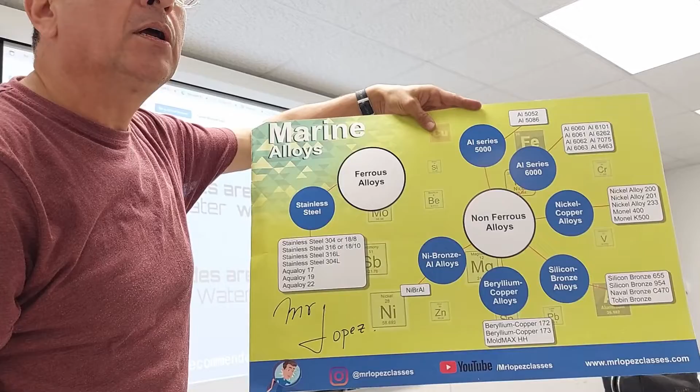I have ferrous alloys and non-ferrous alloys. You have ferrous alloys, those are the ferrous alloys allowed for marine environment. Non-ferrous alloys, all of those alloys are allowed: alloys based on aluminum, alloys based on nickel copper, alloys based on silicon bronze, alloys based on beryllium copper, or alloys based in copper, nickel and aluminum. Those alloys are allowed for marine environment, non-ferrous. You have that poster in your book. If you want this poster, you can buy this poster.

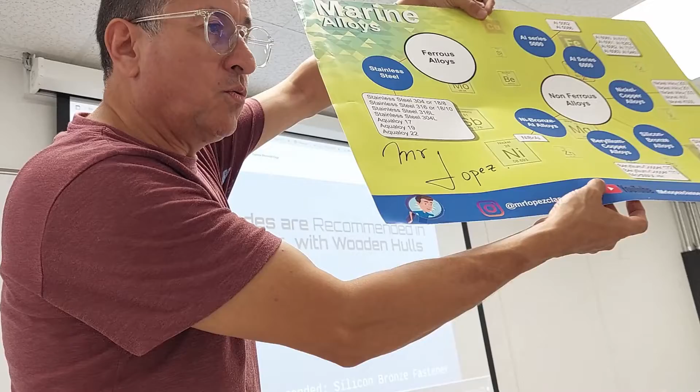Okay, this is for the alloys. This is the pedestal. And this is the boat. And this is the outlet of the boat where the shore power is connected.

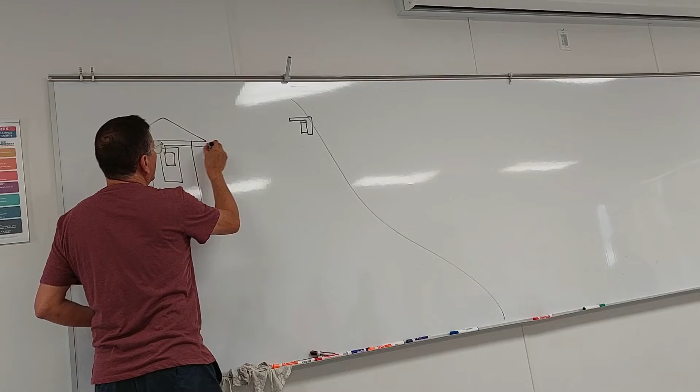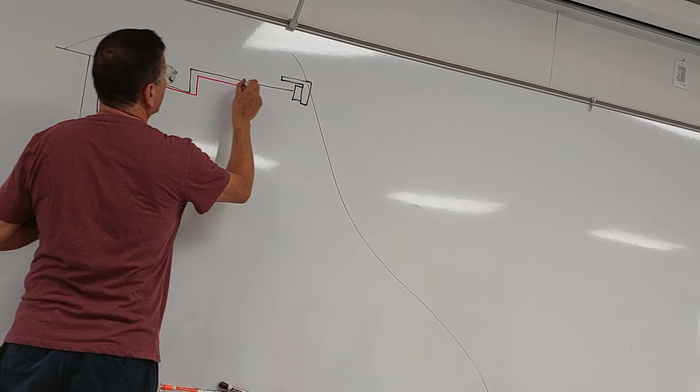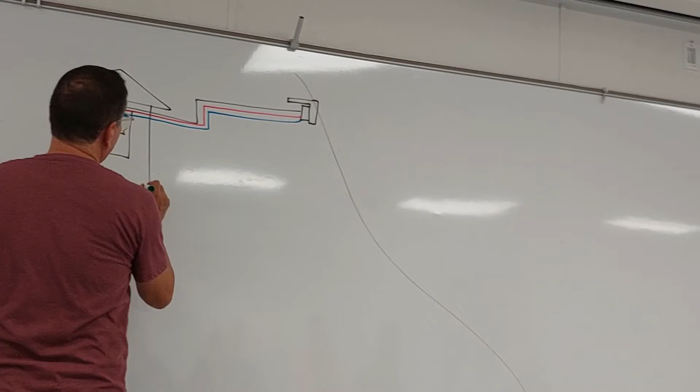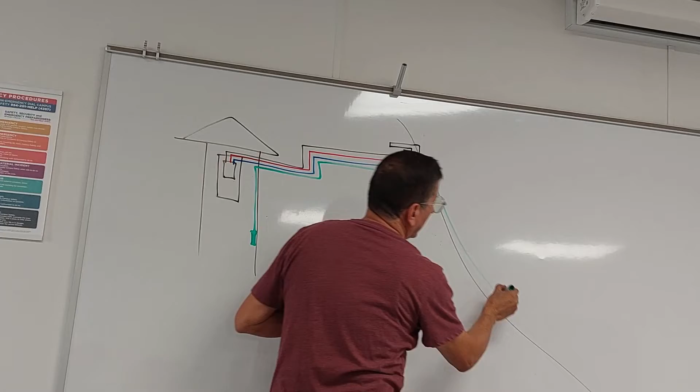Everybody follow me? And here from you have a hot, suppose that is double phase. You have other hot. You have the neutral. And also from here, from the side of the panel, you have the ground. And the ground enters here and goes directly into the ground bus bar of the AC panel, and after that into the...

What is this? Bonding. The bonding conductor. Where is it located normally? Middle of the boat? On the stringer. Oh, okay. And the bonding conductor is connected outside with the sacrificial anode. I put zinc, but could be other metal.

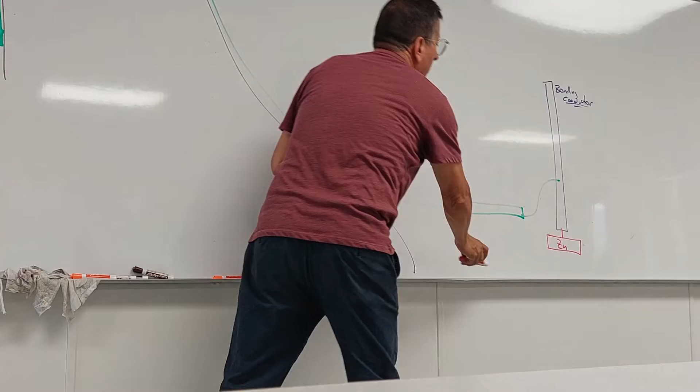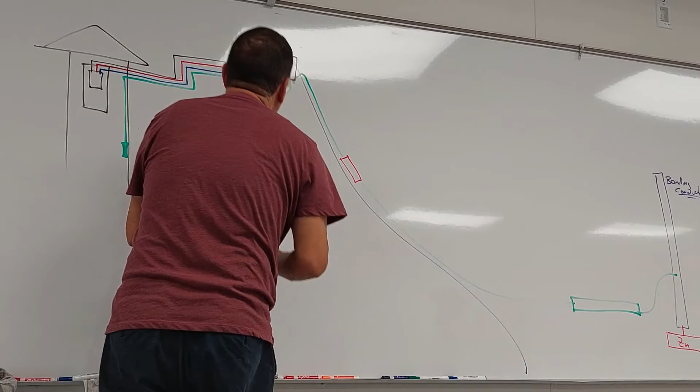That's the ground. And here I have located what? The galvanic isolator. Okay, this is the protection. Now here this is the AC, the main breaker, and those are the small breakers. This is the AC panel. Yeah? AC panel. And look at this.

This is the isolator transformer. Look at the function of the isolator transformer. I have hot, and after that continue the other phase, and this one in the middle is the neutral. Everybody follow me? Because neutral and ground are connected together with the frame, only at the source of the power. In the secondary, I have exactly the same situation.

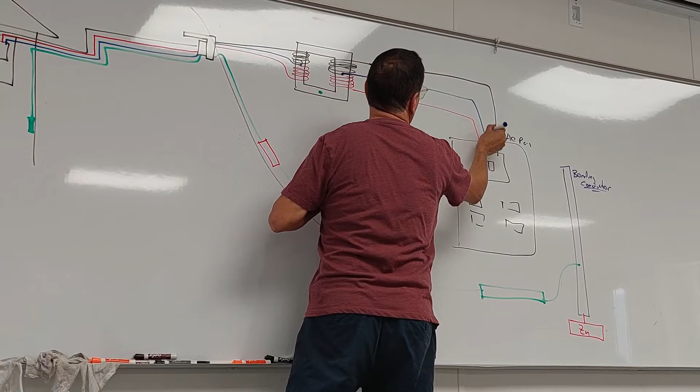This is neutral. This is phase 2, and this is phase 1. That's okay? This is the ground produced for the transformer, and that ground will be connected here.

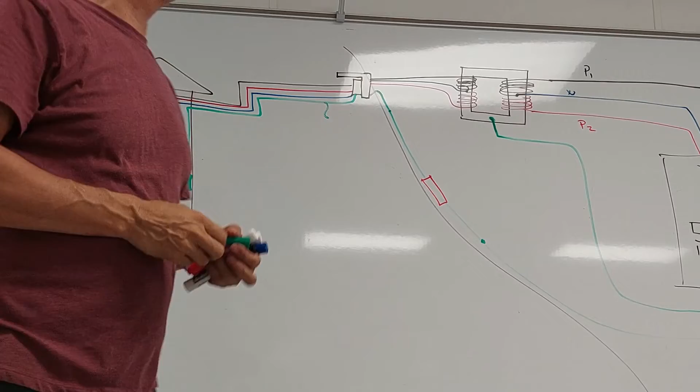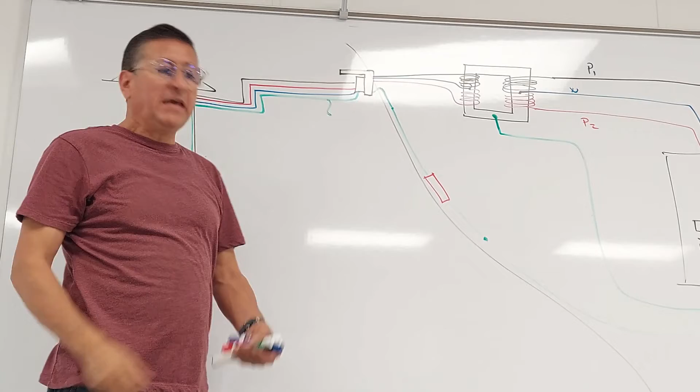Okay, suppose that I have this ground contaminated, like we explained before. We have current in that ground. Does this element protect the boat from a ground contaminated? No. No. Does this one protect the boat? Yes. Yes. Because this one internally has diodes, located in different positions, and capacitors, and blocks that current.

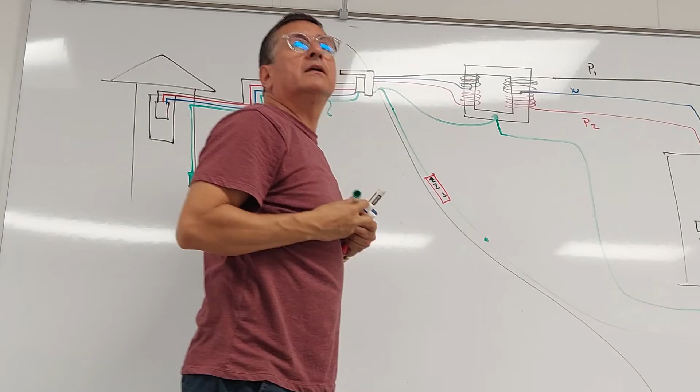Suppose that current enters contaminated here, and that current continues contaminated here. This is not a filter to clean ground. What is the function of this? Clean the sine wave. Clean.

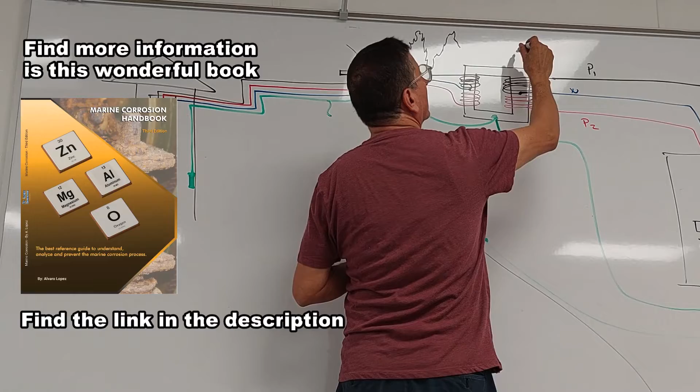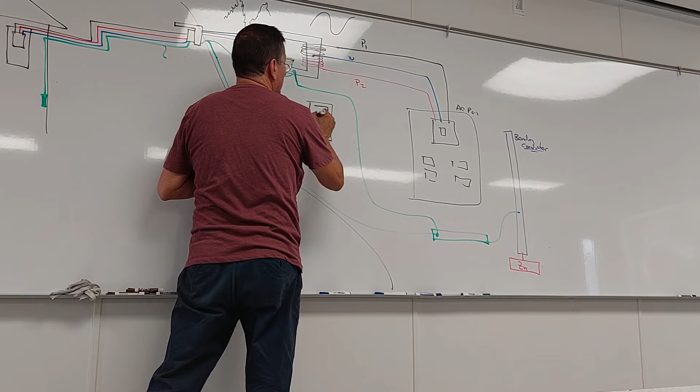I'm going to use the voltmeter here, and we are going to check volts DC. Volts DC. And we are going to connect here, suspended in the water, the silver chloride electrode. This is the water line. I connect to the negative of my voltmeter.

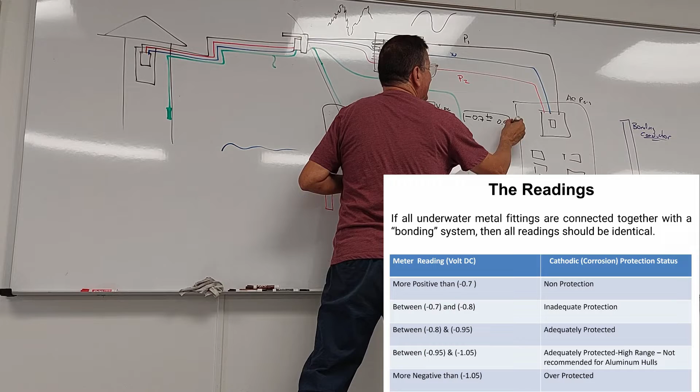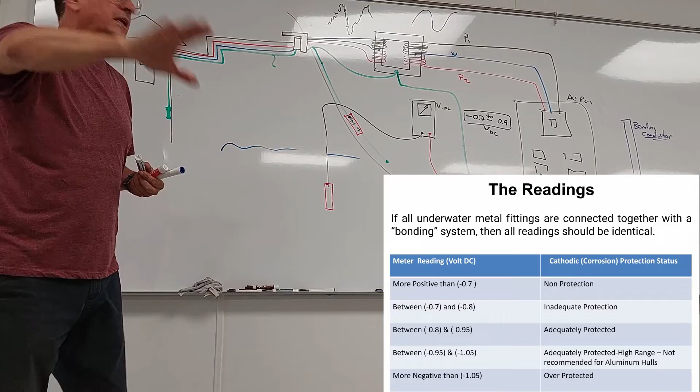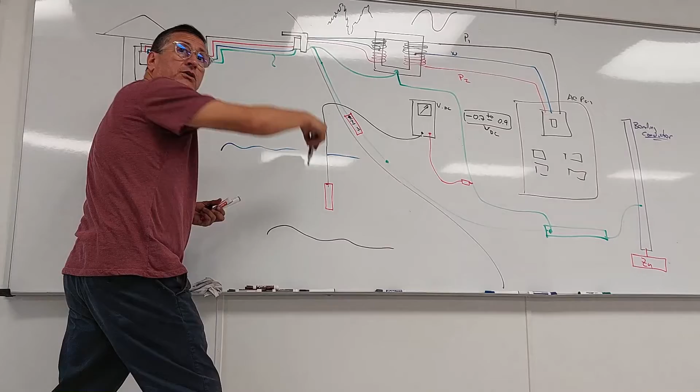All right, but this is not important. In this moment, I check the negative. I connect the silver chloride electrode suspended in the water, not touching the boat and not touching the ground, suspended in the water. And I touch the metallic element that I want to see if it's properly bonded.

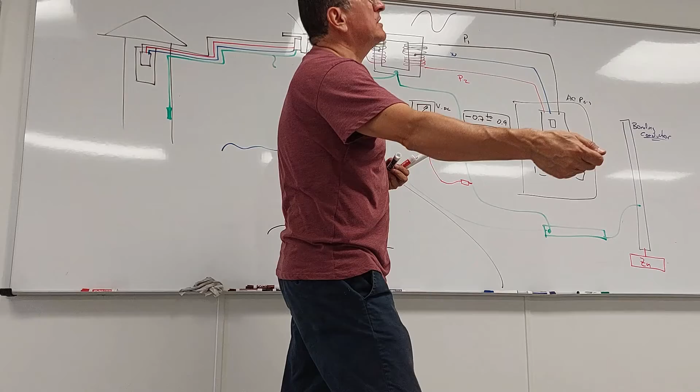Okay, the through hull, minus 0.75. Okay, it's good, it's properly bonded. That block, minus 0.3. Oh, the probe has an extra wire on it? You can do that? Yep.

You need to connect that element to the bonding system of your boat. Connect it to the bonding, prepare the cable. Now the reading minus 0.79. That's a perfect demonstration. Good?

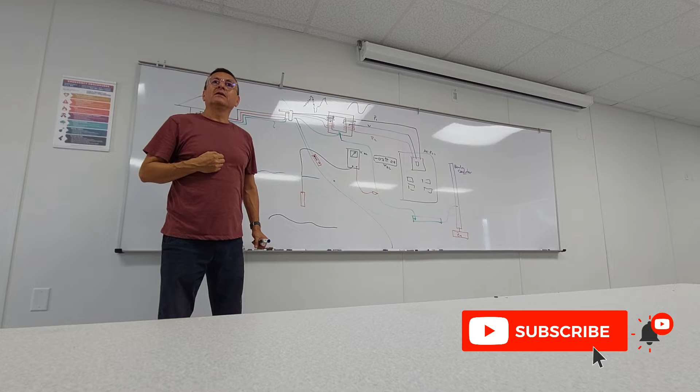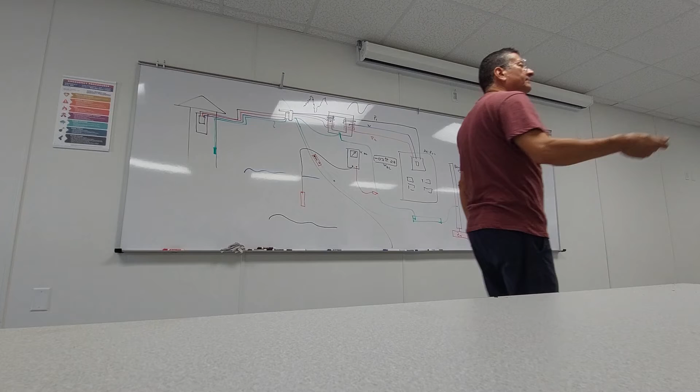Right? This is the silver chloride electrode. You need a silver chloride electrode in your tool? Yes, to demonstrate to the customer that it is good, and also to verify that in the panel you don't have reverse polarity.

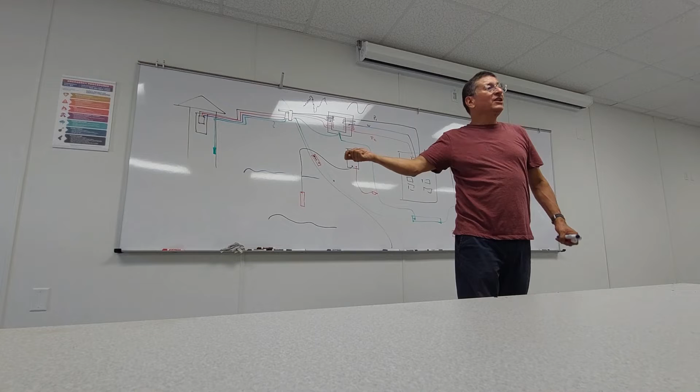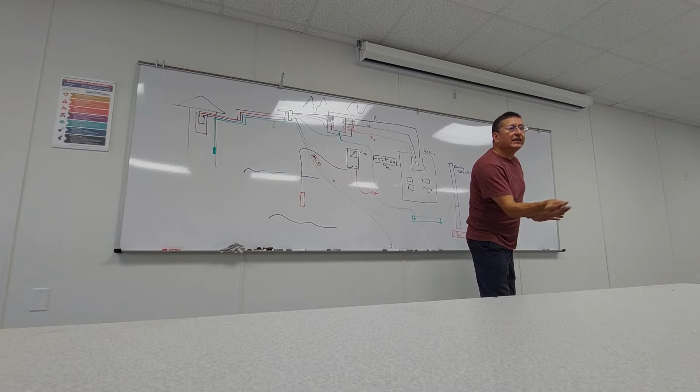Reverse polarity is detected when you use the SureTest, you know if you have reverse polarity. Be careful with this, pay attention. Some inspectors use the yellow block to check the outlet and verify if it's properly wired or has reverse polarity. They say, oh, I found in the galley of this boat one outlet with reverse polarity, and another one in the master room.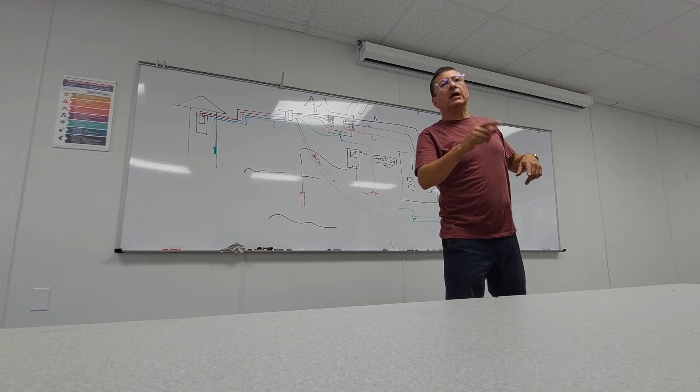This boat is wrong. Excuse me, in the AC panel, do I have reverse polarity? No, it's in that outlet, because some people wire that outlet improperly, and I have reverse polarity over there.

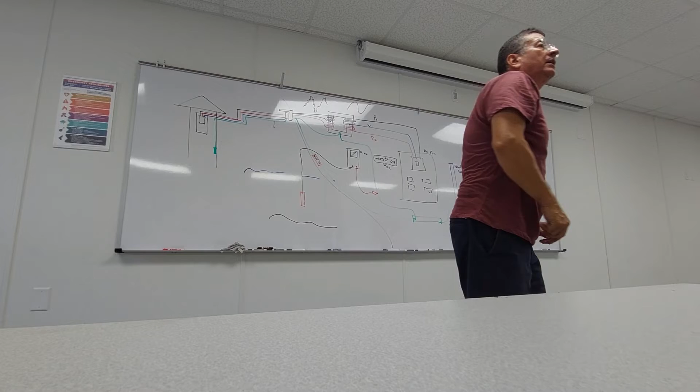Does that situation affect the boat? No. That's how they get you to pay more money. Correct. Is the wiring of your boat wrong for that outlet?

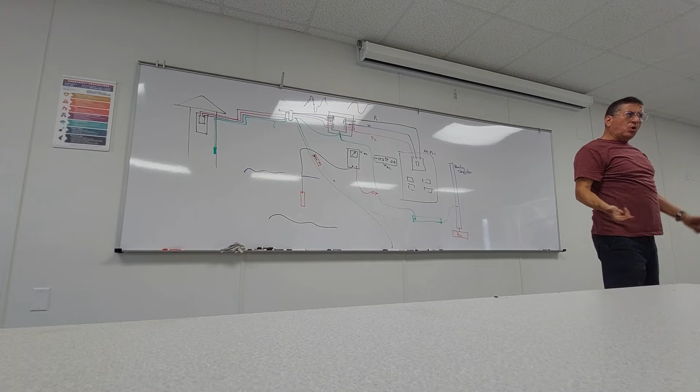No, it's different if you demonstrate to me that the entire boat has reverse polarity, because the power coming from the pedestal is switched. Oh, this is a different situation. The entire boat is reverse polarity. How can you verify if the entire boat has reverse polarity?

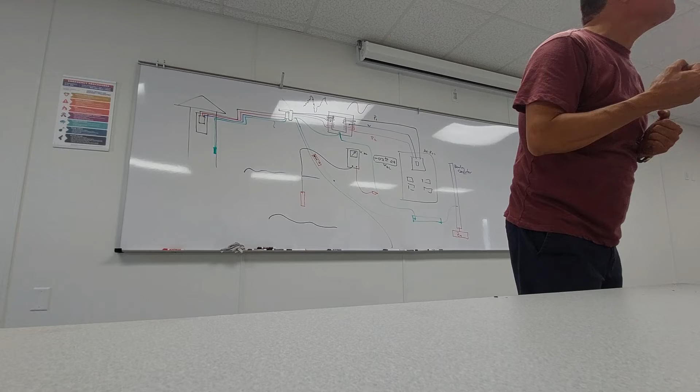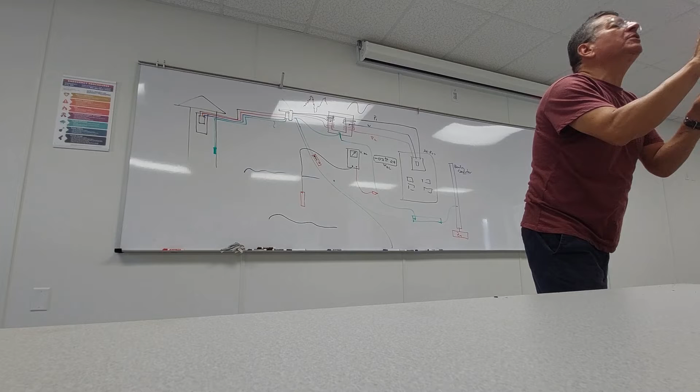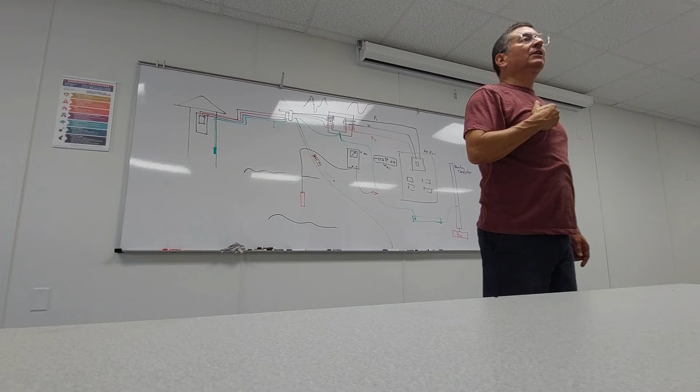You go to the panel and check voltage between neutral and ground. How much should be the voltage between neutral bus bar and ground? 0. Oh, I have 120. You have reverse polarity because you have hot in the neutral, like your boat.

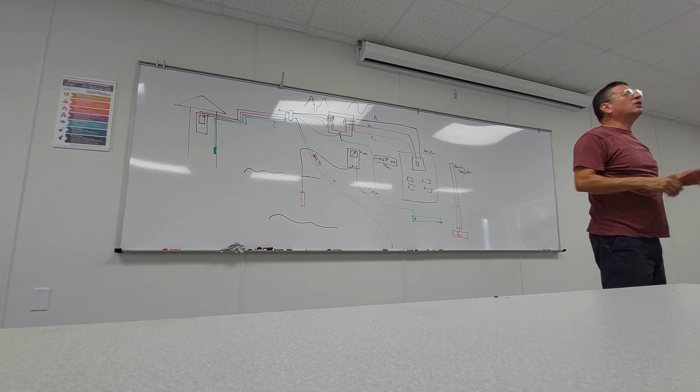Oh yeah, now you understand? In that particular case, the entire boat is reverse polarity, not just one outlet. One outlet I solved by switching the cable, and that's it.

Good, can you go to the pedestal? Normally you have regular outlets, 120 volts, at the bottom of the pedestal, all along the pedestal. You can check the condition of the pedestal with the SureTest. Can you come here and we check this pedestal? Look at this.

If the three lines are solid, it's correct wiring. If only this and this are solid, it's open ground. If this is blinking, blinking, and solid, it's reverse polarity. If this is not solid, not solid, not solid, it's open hot. Those are the possibilities. We have good wiring here. Okay, let me check.

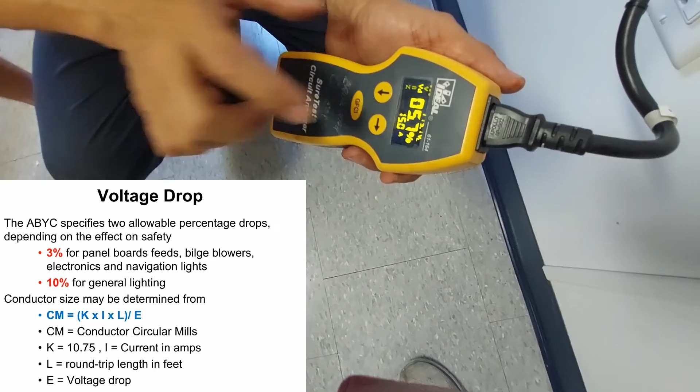The voltage is 122.7. It's great, it's a good voltage. Look at this, the voltage drop is 5.7%. You remember how much should be the voltage drop? Between 3% and 10%. You remember, in the book? It's 5.7, it's good, it's a good voltage drop.

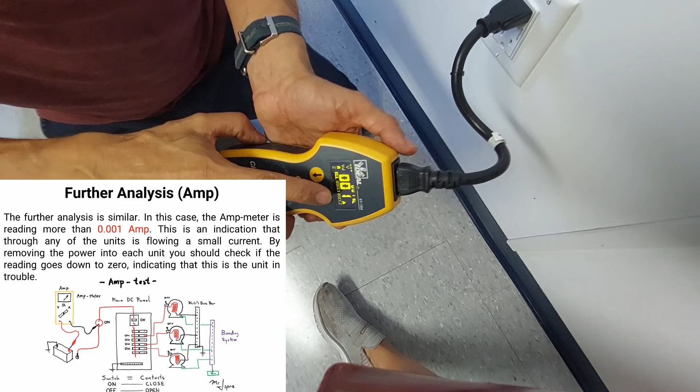It's in the range. Look, you remember in my book on corrosion, when you try to identify if you have leaks of current - right now nothing is connected to the outlet. It's supposed that the flow of amps should be zero, or maximum 1 milliamp. 0.001, 1 milliamp, this is exactly at the limit. It's good, you see? That's perfect.

And look at the resistance. You remember in my book how much the resistance should be? Can you bring the book quickly? Correct, thank you. Look at the volts, and this is the ohms. How much should be the ohms maximum? 1.2, and we have 0.23. That's perfect, no leaks of current.

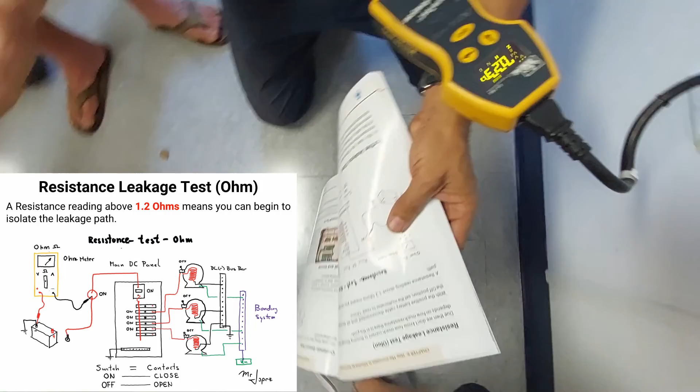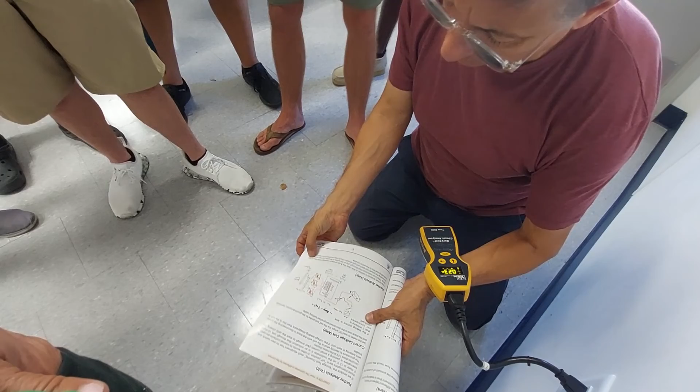This pedestal is perfect. And you see the intensity? Look, the intensity should be no more than 0.001. You see? That pedestal is perfect, and the phases are okay. With this you can diagnose the pedestal, yes or not? Yes. What is the name of the tool? SureTest. SureTest.